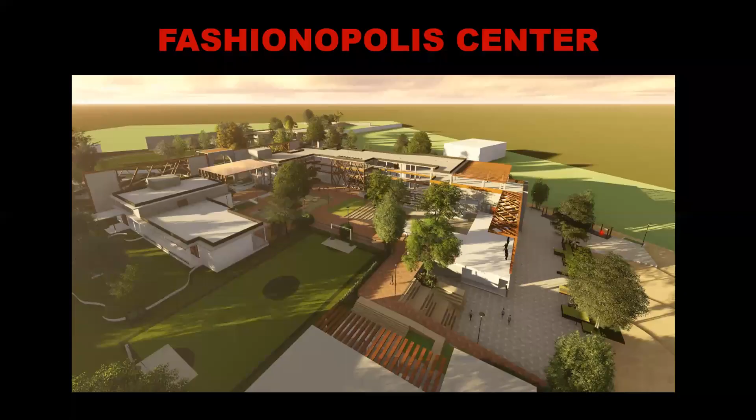Fashion is the most powerful art. It is a movement, design, and architecture all in one. It shows the world who we are and who we'd like to be. So, fashion should be a form of escapism and not a form of imprisonment.

So, I would like to introduce my topic, Fashionopolis Center. Fashion has always been a repetition of ideas. What makes it new is the way we put it together.

So, what does the term Fashionopolis mean? Fashionopolis is a mixed-use project combining unique, futuristic, and varied project components.

As India is one of the fastest growing countries in the world, and Indian fashion is recognized as one of the tremendous fashion industries, the demand of fashion in and around the country has risen drastically.

This is a graph showing the top 10 cities of fashion colleges in India, from which we can see that Bangalore has the most number of colleges. And these are some of the major fashion institutes in India.

And this map shows the major fashion institutes in Bangalore, from which we can see that most campuses are located towards the center of Bangalore.

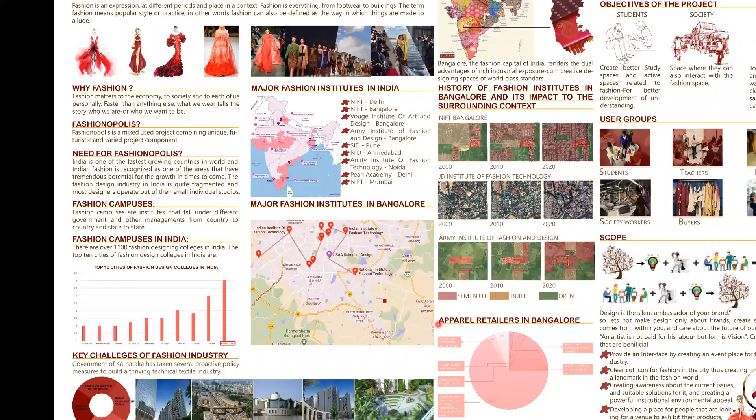So why does Bangalore consist of such a lot of fashion campuses? It is due to the dual advantage of rich industrial exposure from creative designing spaces of world-class standard.

A few major fashion institutes in Bangalore were looked upon to understand the development over the years, that is NIFT Bangalore, JD Institute, and Army Institute.

Now, coming to the aim of the project, the aim is to explore the depth of the Fashion Institute and combine spaces and events that are unique and functional to the fashion world.

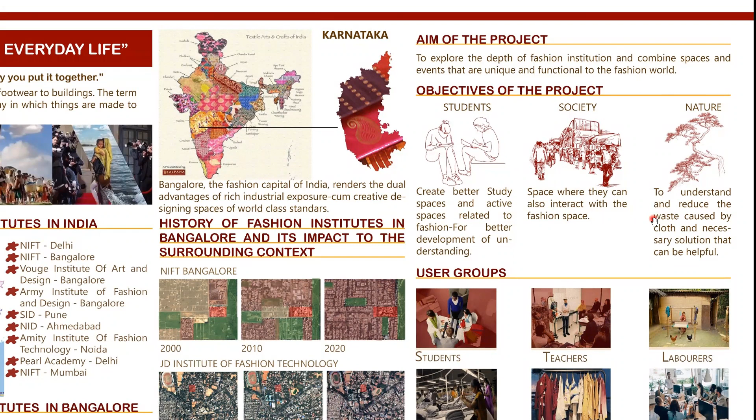The objectives are to create better study spaces, spaces to interact with fashion-related spaces, and to reduce the waste caused by clothes and other necessary solutions.

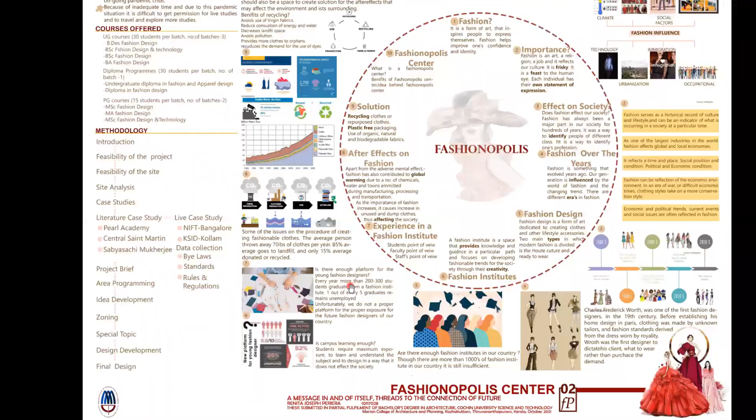Now moving to the feasibility part of the project: what is fashion, the importance of fashion, the effect on society, fashion over the years, fashion design, what is a fashion design, what is a fashion institute.

And the experience of a fashion institute, and the after effects on fashion and its solution, which led to the Fashionopolis Center.

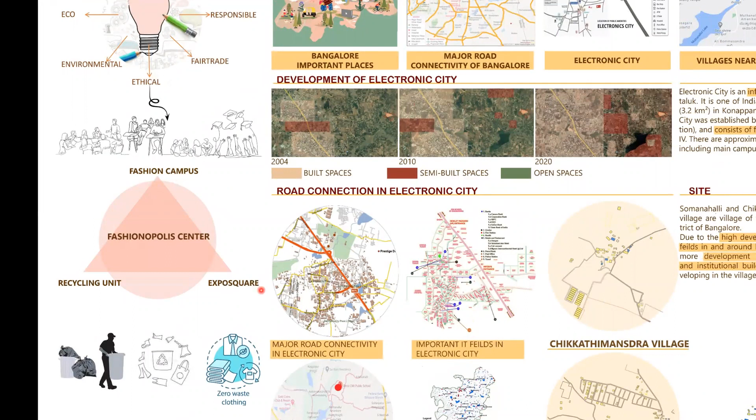The Fashionopolis Center, based on the study, consists of three major components: the fashion campus, the Exposquare unit, and the recycling unit.

And in order to provide this project, I've chosen my site in Bangalore near Electronic City. So the development of Electronic City and major road networks was studied, which led me to the site in Chikkathimansdra village.

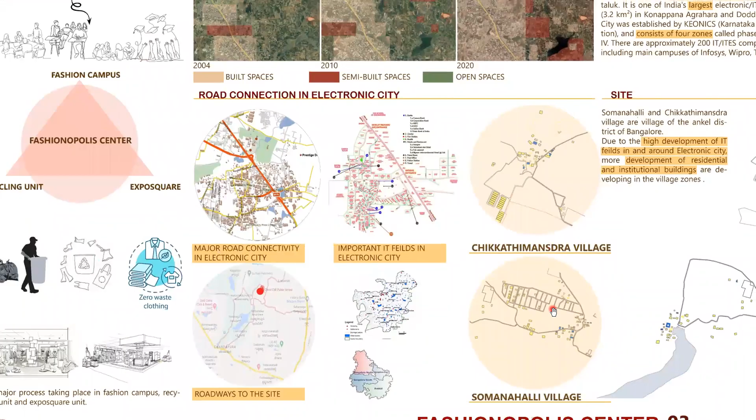And Somanahalli village of the Anekal block. Now coming to the site analysis, the site is located in Somanahalli village near the Christ CMI Public School, Bangalore.

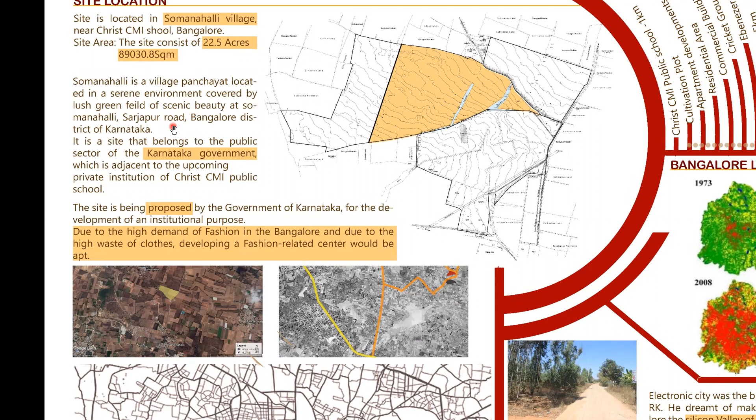The site consists of 22.5 acres. The site belongs to the public sector of Karnataka government, in which the site is being proposed by the government of Karnataka for the development of an institution purpose.

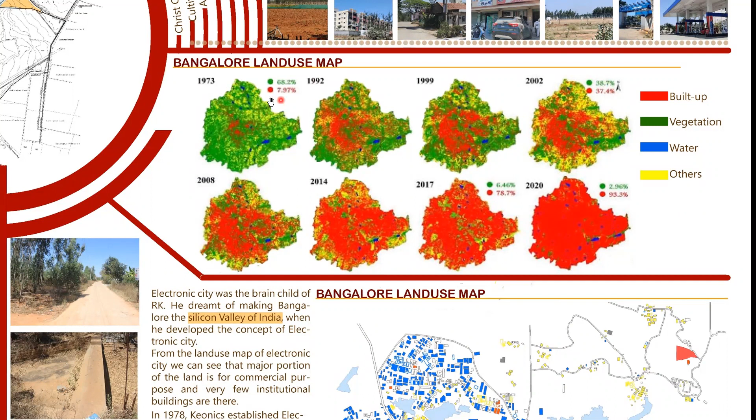So this is a context within a 5-kilometer radius from the site. This is the land use map of Bangalore, from which we can see that the built-up has increased from 7.9 to 93% over the years.

Coming to the land use map of Electronic City, we can see that the city consists of more commercial and IT buildings and very few institutional buildings.

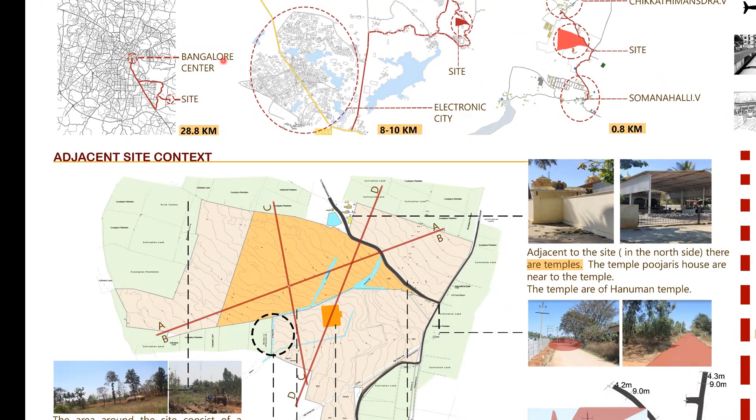Now, coming to the site context, the distances from Bangalore centers, Electronic City, and from the nearby villages to the site. And in the adjacent site context, on the northern side of the site is the temple.

One is a Hanuman temple, and on the southern side is the Christ CMI Public School, with plantations like eucalyptus, grapes, jacktree, etc. on the east and western side.

There are electrical lines that run through the main road. Then there is also a water channel that runs through the site, which passes through the Christ CMI Public School.

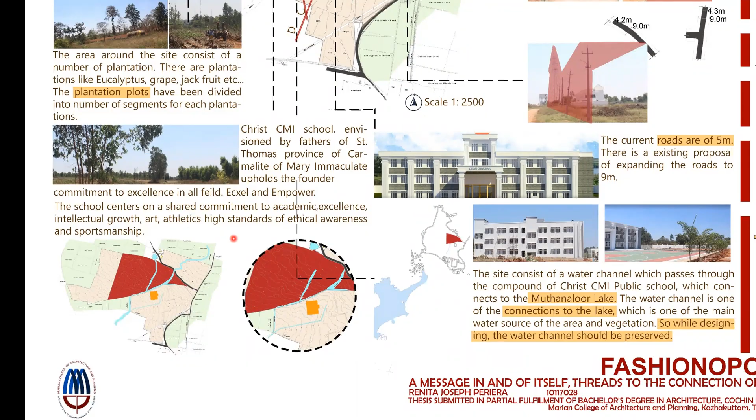To the Muthanaloor Lake, which is one of the main water sources of the area and for vegetation. The water channel has lost its connection in some parts of the site, as the site was filled with mud for plantation purposes. Here are some of the pics and sections of the site.

Now coming to the vegetation mapping, the main vegetation in the site is eucalyptus plantation in the center, and at the edge thick vegetation like jack tree, coconut tree, bombax tree, etc.

Due to the high temperature during the months of March to May, the leaves of eucalyptus trees are dried.

This is the land use map of the Somanahalli village and the main roads to the site, with the nearby water bodies to the site.

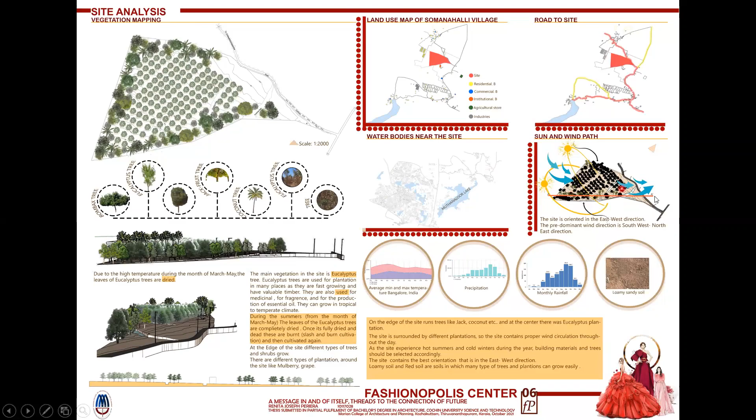Now coming to the sun and wind path, the site is oriented in the east-west direction and the predominant wind direction is southwest to northeast. So the building should be oriented based on the wind direction.

The soil present in the site is loamy and red soil, so any kind of plantation and trees can be grown.

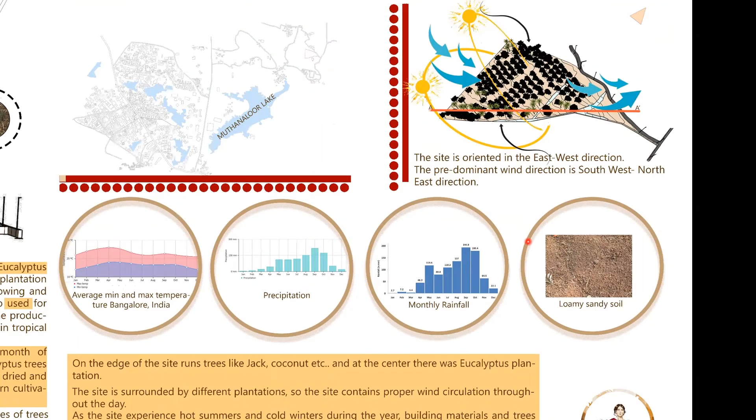Now coming to the SWOT analysis, some of the strengths of the site are that it's located in Bangalore, which is known as the fashion capital of India. It is also located in an area with proper vegetation and proper ventilation.

The site consists of an existing water channel that runs through it. The building should be designed in the southwest-northeast direction based on the wind direction.

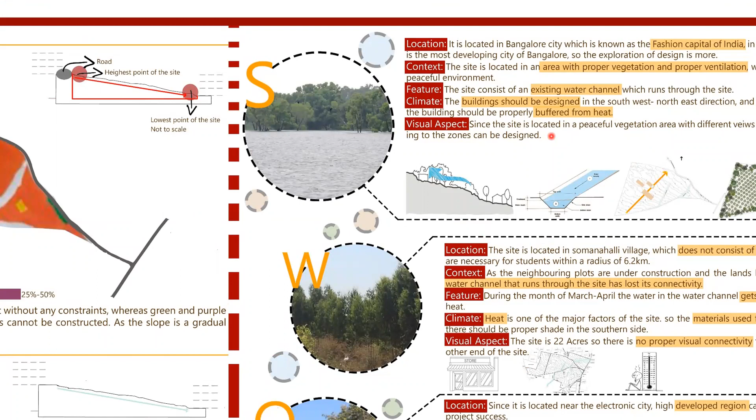The weakness of the site is that it does not consist of any purchase stores necessary for students within a radius of 6.2 kilometers.

As there are plots that are under construction or used for vegetation, the lands are being filled, which causes the loss of connectivity of the water channel.

So heat is one of the major factors of the site, and the material used for construction should be chosen accordingly.

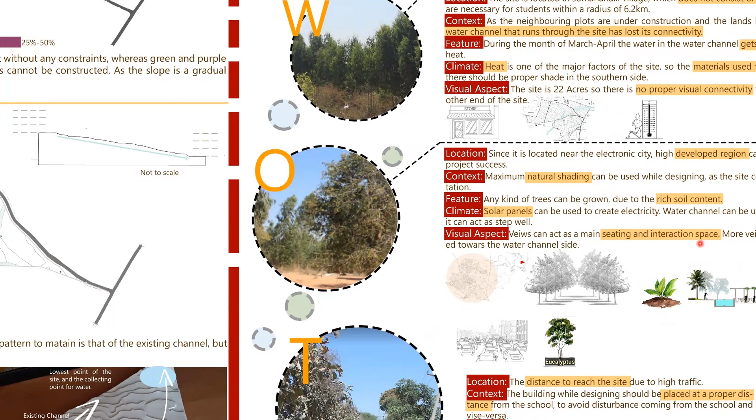There is no proper visual connectivity from one end to the other end of the site, as the site is of 22 acres. Now the opportunities in the site: it is located near Electronic City, which is a highly developing area.

This helps to make the project a more successful one.

Maximum natural shading can be used while designing. Any kind of trees can be grown due to the rich soil content, and more views should be oriented towards the water channel, creating more seating and interaction spaces.

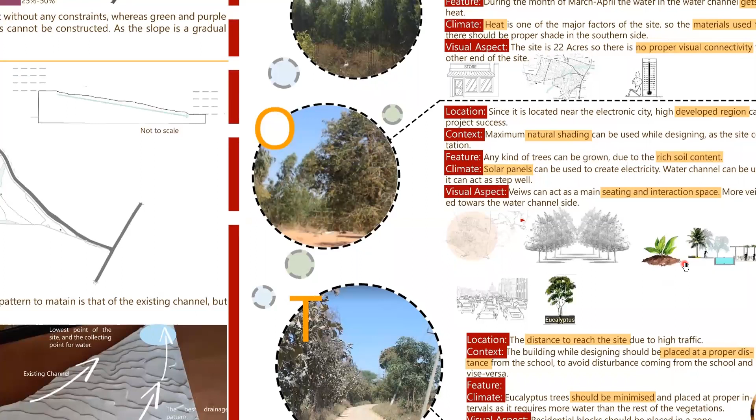Now coming to the threats: while designing buildings, they should be placed at a proper distance from the school to avoid disturbances. The amount of eucalyptus trees should be minimized as it requires more water than the rest of the vegetation.

Now coming to the case studies, there are 5 case studies: 3 literature studies and 2 live studies.

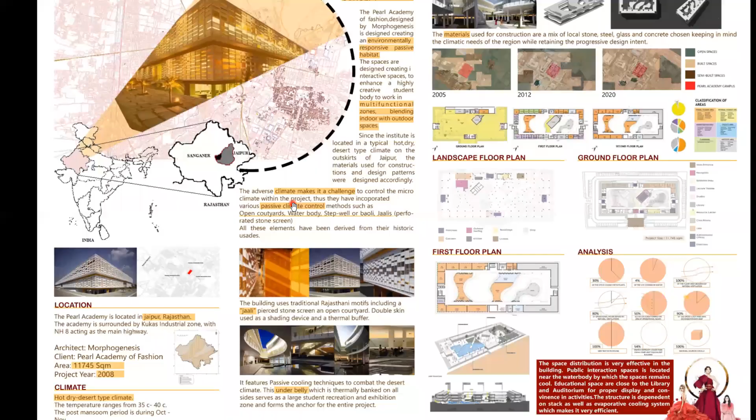The first one is the Pearl Academy, located in Jaipur. The reason I chose Pearl Academy is due to its passive climatic control design, where they have used jali walls to control the amount of heat entering the building.

It also has passive cooling techniques to combat the desert climate and other various climate control methods such as an open courtyard, water bodies, and step wells.

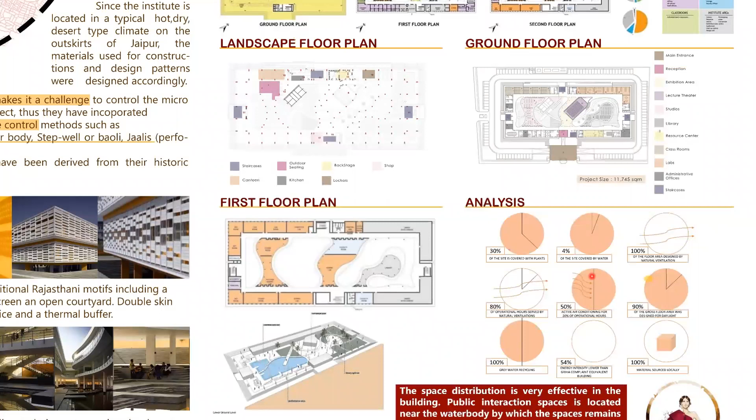In the analysis, we can see that 30% of the site is covered with plants, 4% covered with water, 100% locally available materials were used for construction, and the space distribution is very effective throughout the building.

The second case study I have chosen is Central St. Martin's, located in London. The main reason I chose this is because of its interaction with the water body and the use of skylights in the hallways and in the design classrooms.

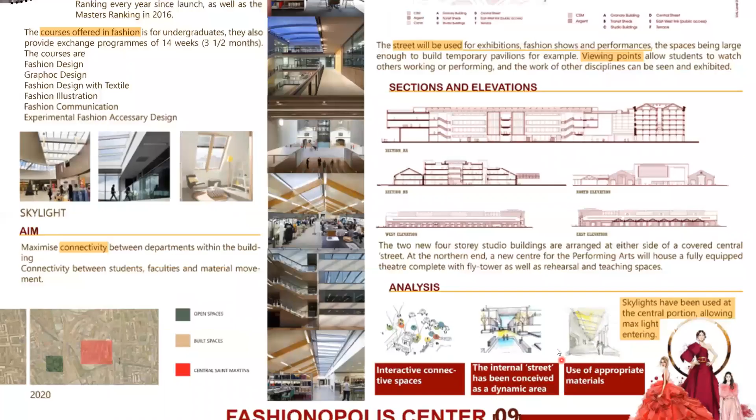Coming to the analysis, there are more interactive connected spaces as the campus consists not only of fashion design but also other courses. Now moving to the third literature study, I have chosen the Sabyasachi Mukherjee store.

Situated in New Delhi, the idea of choosing this project was due to the symmetrical planning with stairs that divide the 2 blocks and also act as an elementary feature to the site. Though the exteriors are very simple, the interiors are its contrast, with bright and decorative elements.

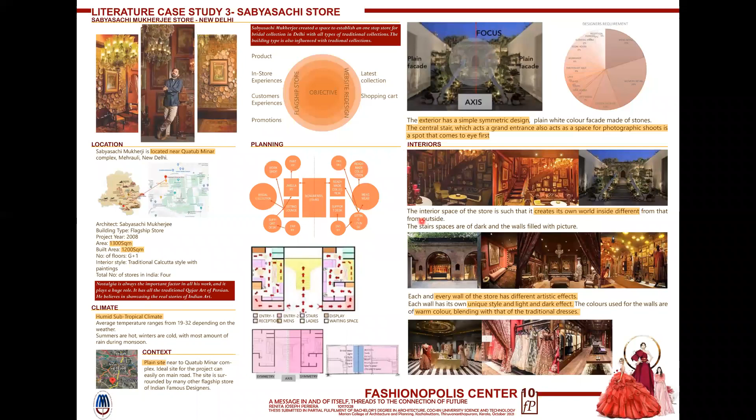Now coming to the live case studies, the first case study that I have chosen is KSID, which is located in Kollam. The architecture style of KSID is vernacular architecture of Kerala.

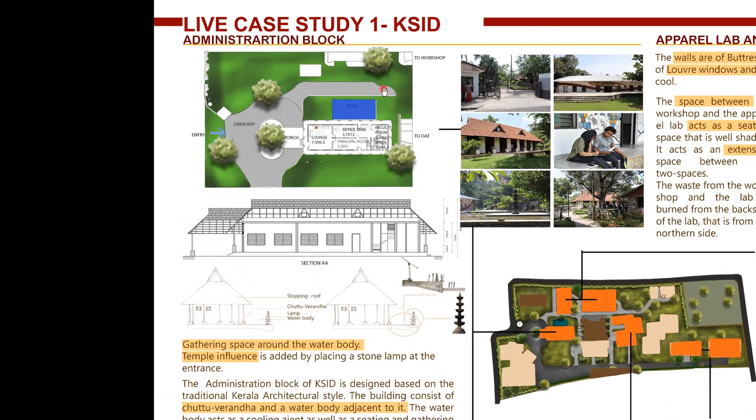Moving to the plans, the administration block consists of a water body. It is not only an elementary feature, but it also acts as a gathering space.

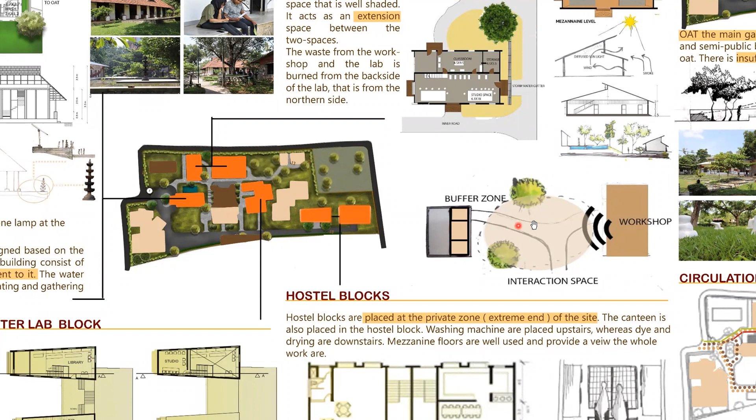The space between the apparel lab and the workshop is a buffer space used as a work exhibition space or for interactions. The library, textile, and computer lab block acts as a clock tower, as it is the tallest building on the site.

This is the circulation movement of different user groups within the site. The buildings are designed with north light, allowing maximum natural light to enter the building.

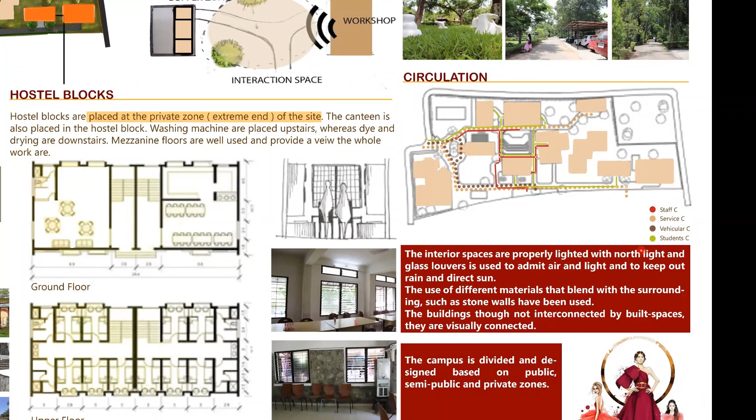The second case study that I have chosen is NIFT, Bangalore. The concept of the building is developed based on the golden spiral, or based on a snail shell.

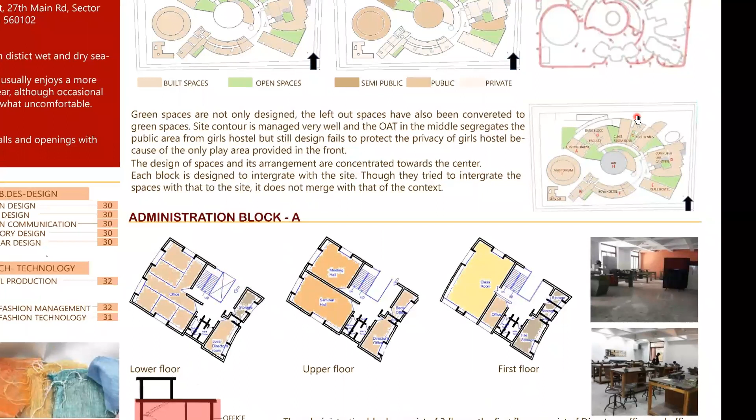The campus consists of a number of blocks, from A to I. In the administration block, the building is divided into public, semi-public, and private zones vertically.

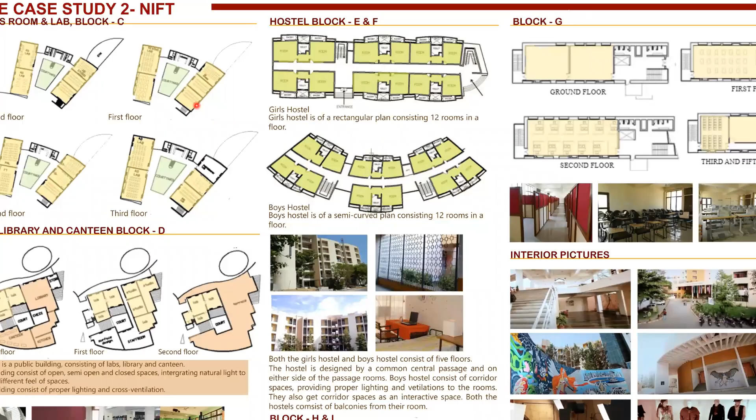There are courtyards or open spaces between classrooms, allowing maximum natural light and ventilation to enter the spaces. The building is designed incorporating built and open spaces in an equal ratio.

The interior walls of the building consist of a number of art and design works done by students.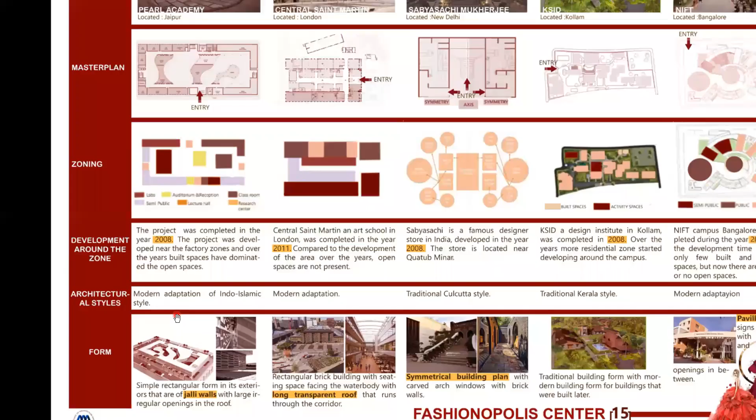Factors like development around the zone, architecture styles, and form will be looked upon, in which the Pearl Academy consists of a simple rectangular form in its exterior with jali walls.

Central Saint Martins is of rectangular brick buildings with seating spaces facing the water body, with a long transparent roof running through the corridor. In Sabyasachi, it is the symmetrical building plan with carved arch windows and brick walls.

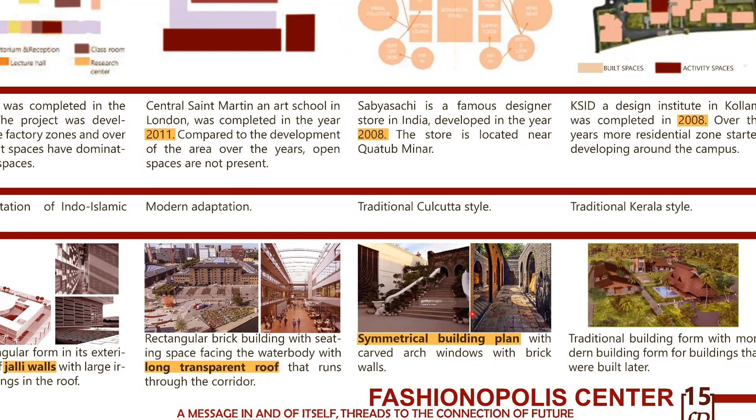And in NIFT, it is the pavilion design with landscape detailing.

The pie chart shows the programs, and these are the circulation patterns of the user groups in each building.

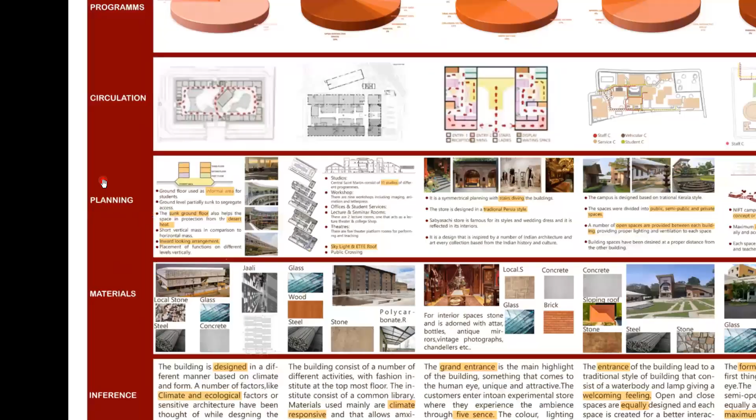Now coming to the planning, in Pearl Academy, the ground floor is used as an informal area for students, with a short vertical mass in comparison to horizontal mass, inward looking arrangements, and placement of functions on different levels vertically.

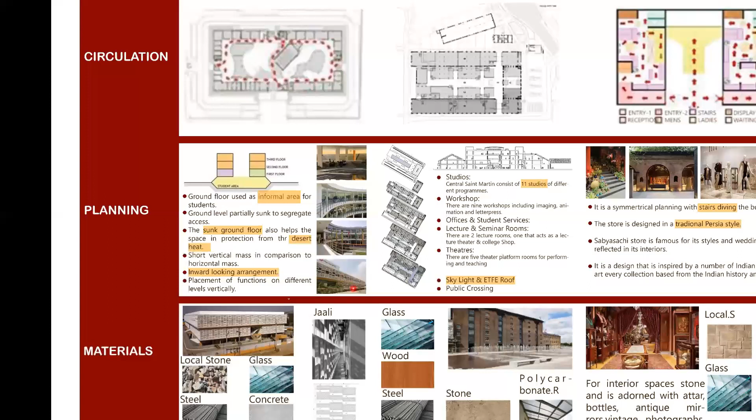Now in Central Saint Martins, there are 11 studios of different programs. There are also workshops, offices, lectures, seminar halls, skylights, and ETFE roofs.

In KSID, the spaces are divided into public, semi-public, and private spaces. A number of open spaces have been provided between each building, providing proper lighting and ventilation to each space. Buildings have been designed at a proper distance from one another.

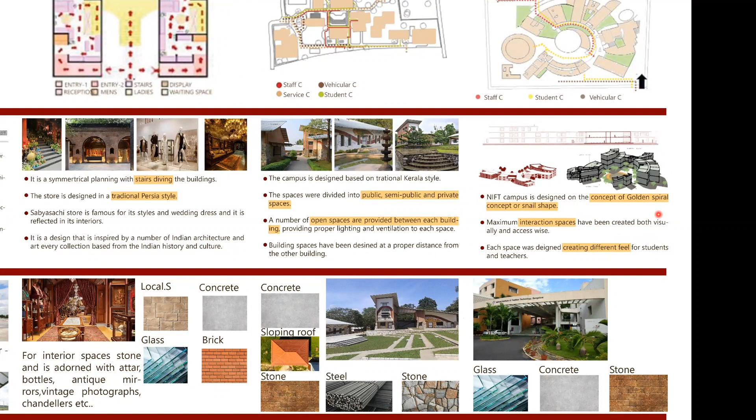And coming to NIFT, maximum interaction spaces have been created both visually and access-wise, and each space was designed creating a different feel for students and teachers. These are the materials used in the buildings, and most of them are locally available materials.

Now coming to the inference, the building is designed in a different manner based on climate, form, and its construction strategy. Climatic response, spatial allocations, all rely on natural environment factors.

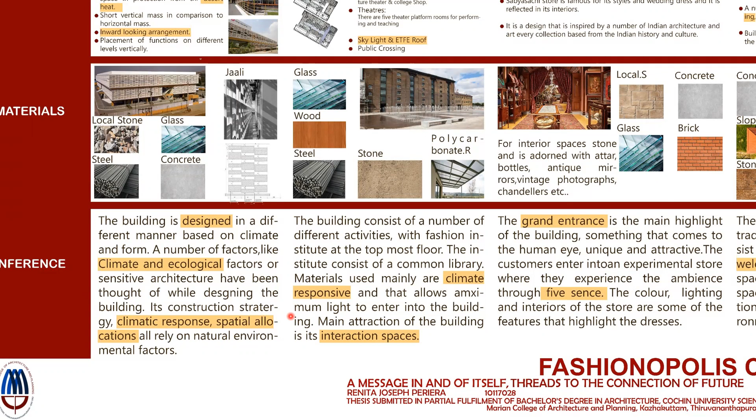In Central Saint Martins, there are different activities within the building, with the Fashion Institute at the topmost floor. And in Sabyasachi, the grand entrance is the main highlight of the building, something unique and very attractive that catches the human eye.

Now in KSID, the entrance of the building leads to a traditional style of building that consists of a water body and a lamp, giving a welcoming feeling.

Whereas in NIFT Bangalore, the form of the building is one of the first things that comes to the human eye. The building consists of open and semi-open spaces equally, allowing maximum natural light to enter, creating more interactive spaces.

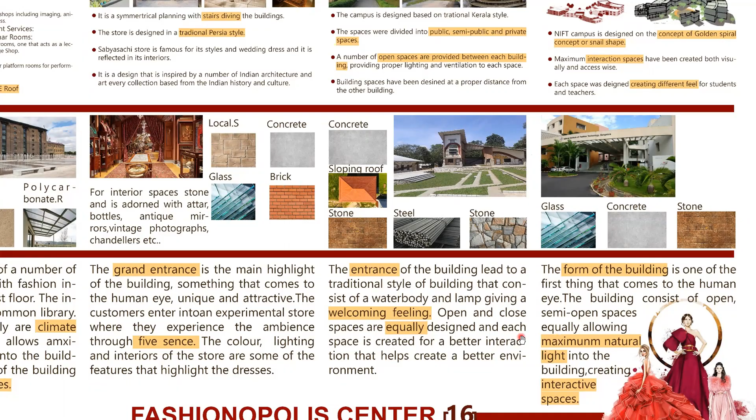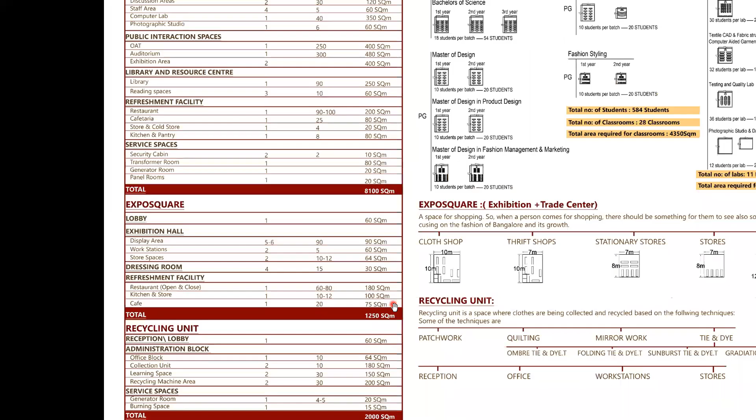So in order to understand the courses and the type of classrooms required, area programming has been done, in which the main courses provided are fashion design, fashion marketing, fashion communication, and fashion styling, with subdivisions of UG and PG courses. While looking into the classroom spaces, certain classrooms require studios, while some require only study spaces, and some require conference or discussion panel spaces.

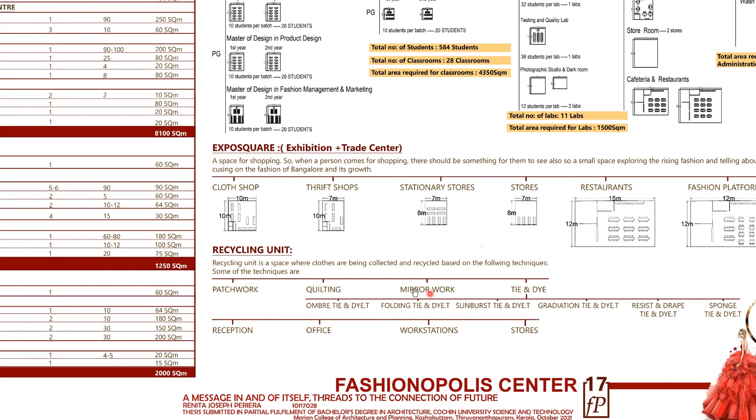So in the Expo Square unit, it is the exhibition plus trade center. It requires a number of stores and other exhibiting spaces. Whereas the recycling unit is a space where clothes are collected and then recycled using different techniques. The main technique used here is the tie and dye process, which requires more of an outdoor space.

Now coming to the design considerations, first user groups were identified, of which 60% of the site consists of students, 15% faculty, 20% society workers, and 5% buyers.

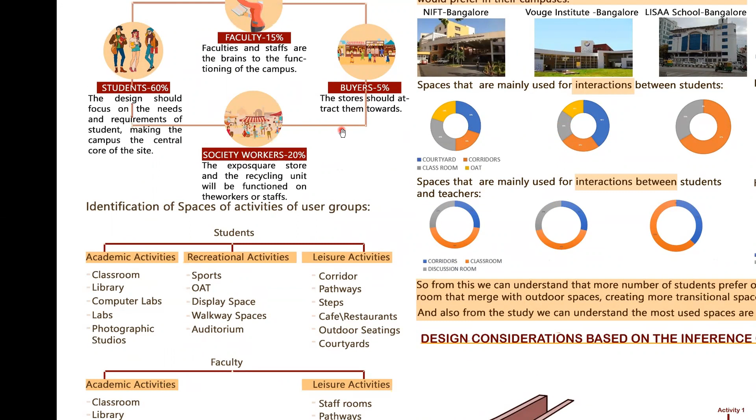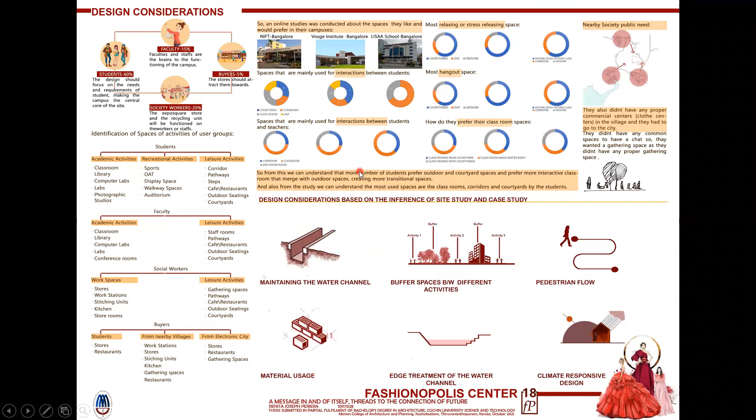I also tried to identify the social and environmental activities of each user group. Based on the user groups, I conducted an online study of 3 different colleges in Bangalore to understand what kind of spaces and which spaces the students would have preferred in their campuses. Based on the study, I inferred that the most interaction happens within the classrooms and corridor spaces, and they preferred more outdoor spaces.

So coming to the design considerations based on the inference of site study and case study: first is maintaining the water channel, then providing buffer spaces between different activities, then providing more pedestrian pathways and reducing vehicular movement, using locally available materials, treating the edge of the water channel, providing maximum interaction between different user groups, and making the design climate responsive.

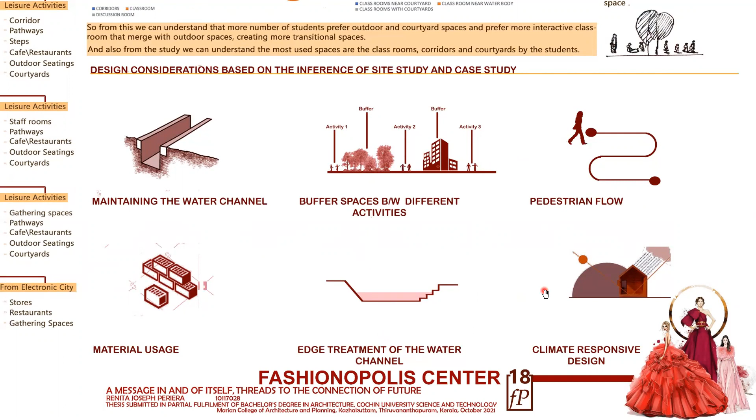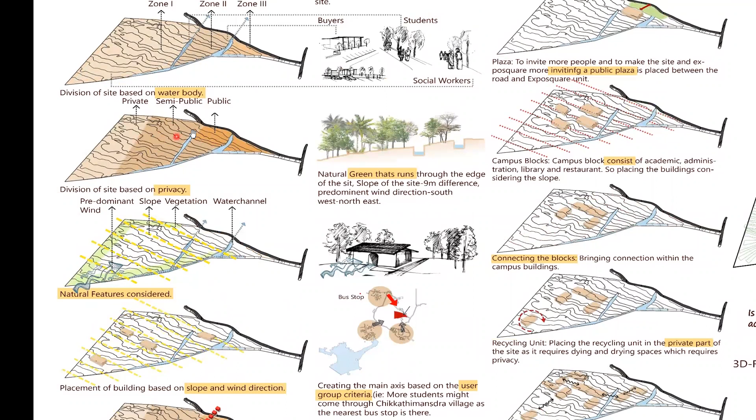Now coming to the zoning, a number of factors were looked upon. First the setback was looked upon in the site. Then the site was divided based on the natural feature, that is a water body, and further divided based on the privacy of the user groups, that is public, semi-public, and private.

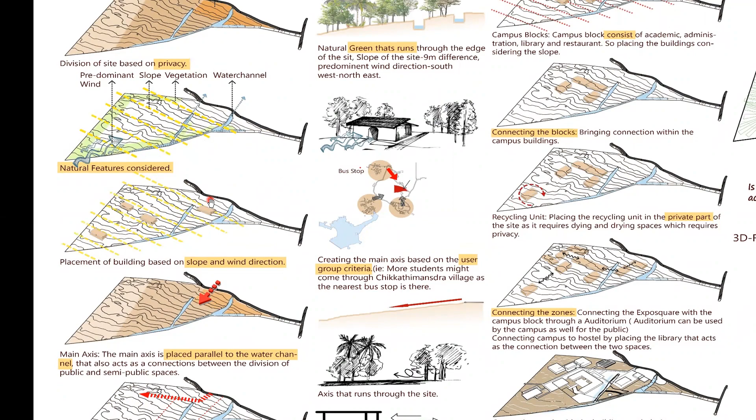So based on the natural elements, that is the vegetation, wind, water body, and the slope of the site, it was then divided, placing the buildings according to the slope and the wind direction. The benefit of the site is that the wind direction and the slope of the site are in the same direction. Now coming to the main axis of the site, or the main entry to the site.

The main entry to the site has been provided based on the user group criteria. That is, most students might come through the Chikkathimansdra village as the nearest bus stop is there. Then from the main axis, 2 parallel sub-axes have been created to enter the different functions.

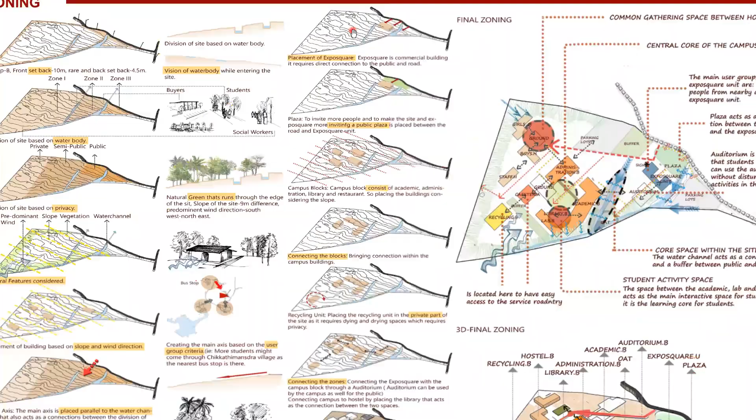Now, placement of the Exposquare unit. The Exposquare unit is a commercial building, so it requires direct contact with the road. Keeping the setback in mind, it is kept at a particular distance. So to create a direct connection, a plaza has been introduced while designing, creating a link between the road and the Exposquare unit.

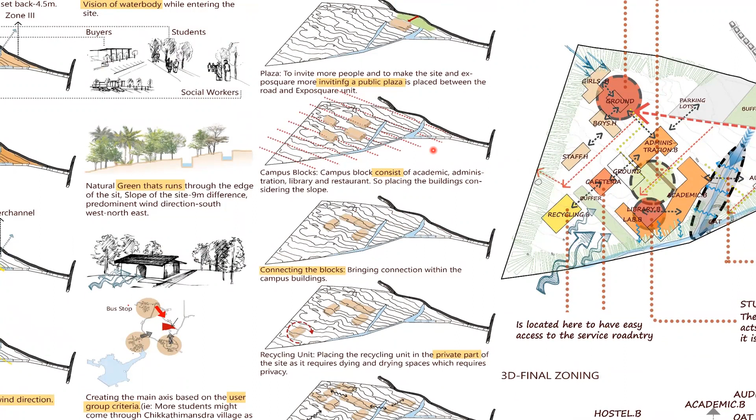Now coming to the campus block, the campus block consists of 4 different activities: academic, administration, library, and cafeteria. The building was placed considering the slope and then adjusted based on the connection patterns.

The recycling unit is placed in the private part of the site as it requires dyeing and drying spaces, which require privacy. So as the spaces are zoned, I wanted to connect those spaces with a building.

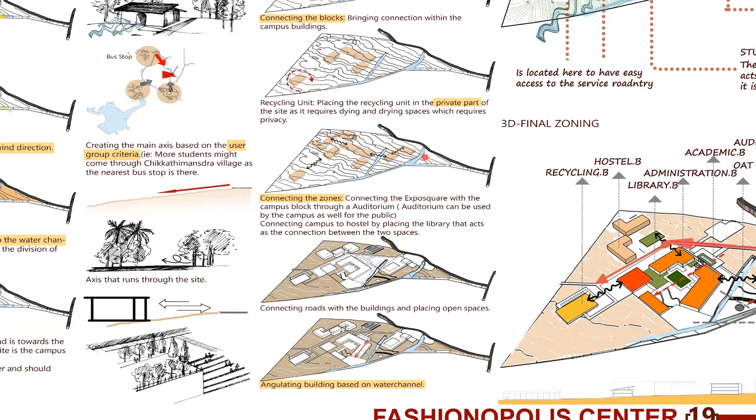So the Exposquare unit is connected to the campus building through an auditorium, which can be used by the campus as well as the public. The campus is then connected to the recycling unit via the cafeteria area, and the campus is connected to the hostel block via the grounds.

Based on this, the road pattern has been developed, from which the academic block, the main block consisting of more user groups, has been slightly shifted parallel to the water channel, allowing maximum view to all sides of the site.

Based on these, the final zoning that I've derived is here: the plaza at the main entry connects the road to the Exposquare unit, which connects to the campus building, that is the auditorium. The campus building is connected to the recycling unit via the cafeteria, and the campus is then connected to the hostel block via the ground spaces. Also, the wind direction and the buildings are placed according to the slope of the site.

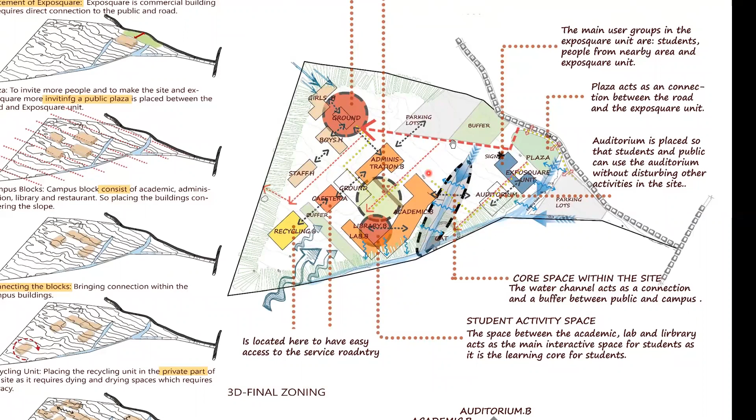This is the block model that was done based on the zoning. Now coming to the master plan.

The site consists of a main entry over here and sub entry with service entry over here. Since the site is designed for different user groups, 4 security cabins have been provided: 2 at the main entry, 1 in the service entry, and 1 over here to regulate the movement of the user groups.

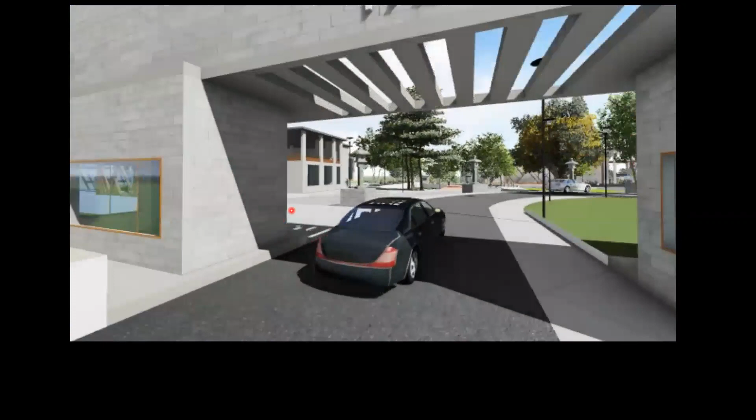The main entry leads to the campus building with a pedestrian pathway of 2 to 2.5 width on either side, with sculptures on one side, directing their way to the campus building, where the campus building has a false facade design with a water body in the center of the road to differentiate the entry and exit of the vehicular movement.

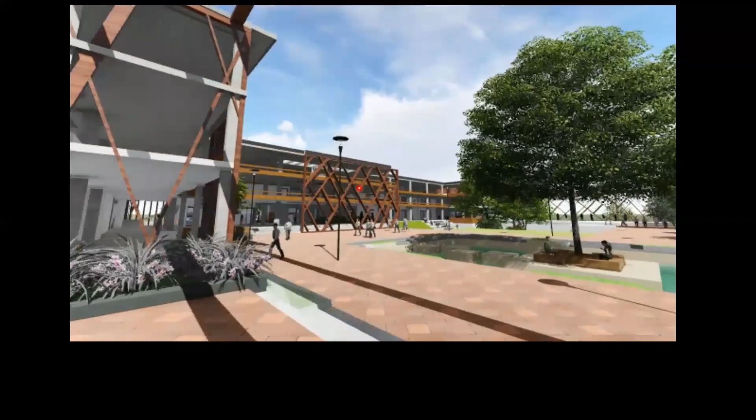Now, coming back to the secondary entry, which is the plaza, a large pedestrian pathway with a number of seatings and stalls and well-shaded trees are designed, and the plaza is designed in the highest portion of the site.

So while designing, the main sub-axes are converted as pedestrian pathways, where the first sub-axis leads to the OAT, and the second, which is in the campus block, leads to the display area. The main axis leads to the residential zone,

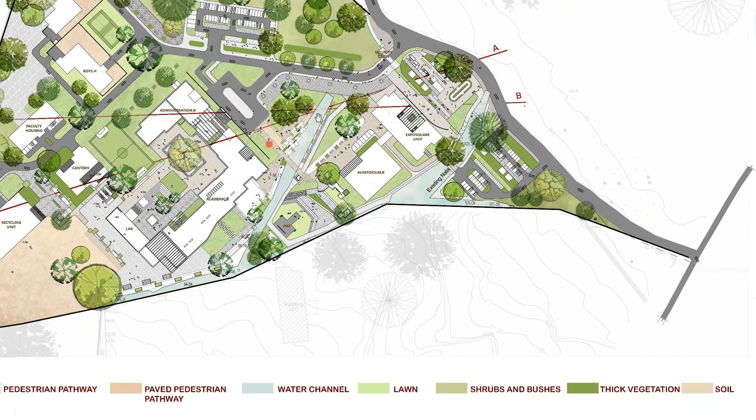and the faculty housing, which then reaches the recycling unit. A number of seating and gathering spaces between each activity to increase interactions have been provided.

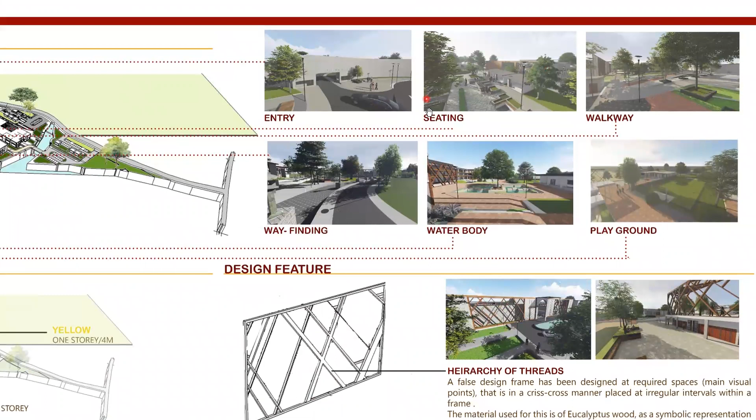Coming to the layers, in the landscape elements, some landscape elements like seating, walkways, water bodies, and playgrounds have been designed. Then these are the built heights of the buildings within the site, the road hierarchy with the number of parkings within the site, and the setbacks and the circulation of the site.

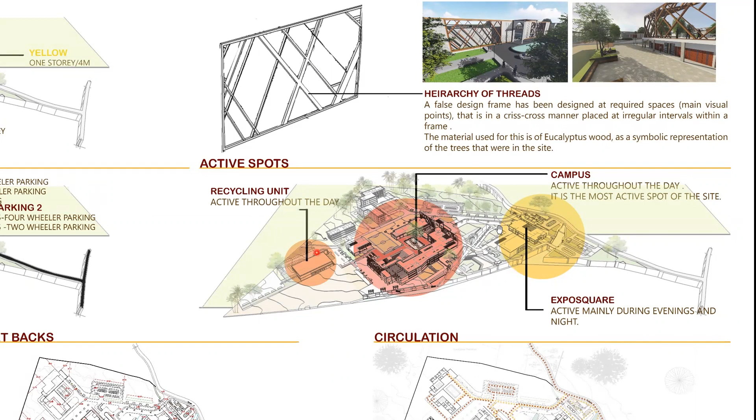Now the different active spots in the site have been identified, which is the campus as the main active zone throughout the day, and the recycling unit is active throughout the day, whereas the Expo Square unit is active during the evenings and nights.

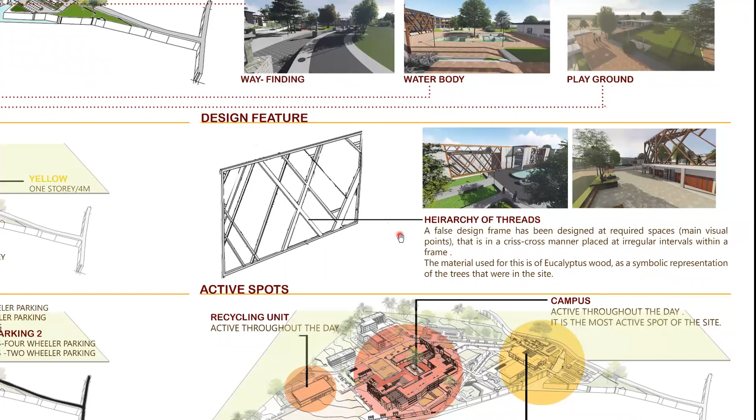Coming to a design feature, a false design frame has been designed at required spaces in a crisscross manner, placed at irregular intervals within a frame. The material used for this is eucalyptus wood as a symbolic representation of the trees that were in the site.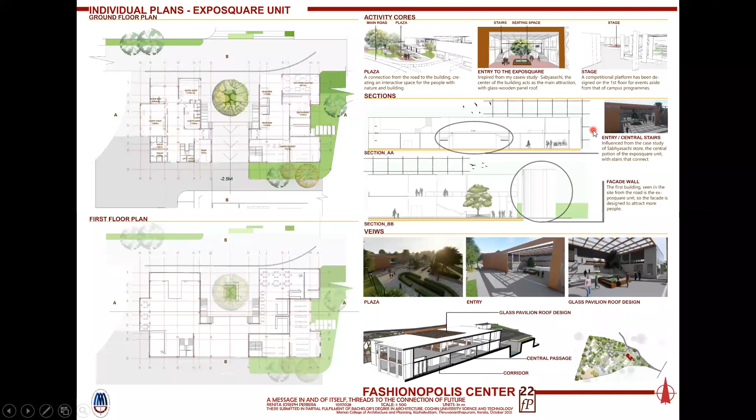These are the sections of the Expo Square unit and the views. The Expo Square unit is the first building which is seen from the road, so a false facade has been designed which is similar to that of the campus building.

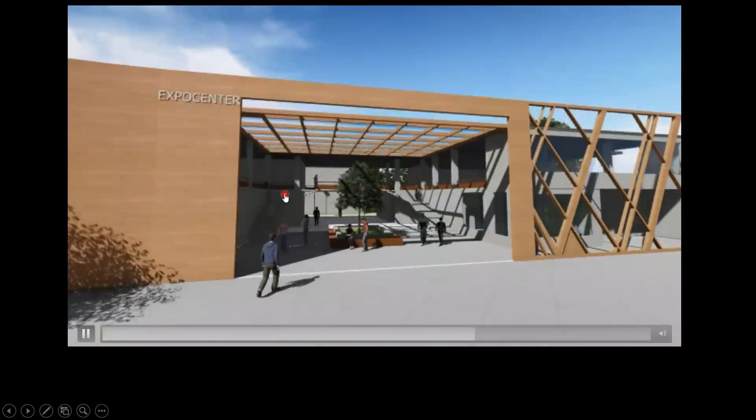This is the plaza which connects the road to the Expo Square unit, and the roof of the Expo Square unit is of glass pavilion design.

Now coming to the individual campus block, the campus consists of 4 units: administration, academy, lab, and cafeteria area. These are connected by the main pedestrian pathway, the main axis.

There's a formal entry towards the administration building, whereas the entry to the academic building is of an informal manner, with corridors of the academic block acting as display or exhibiting areas for each classroom, making the corridors more interactive in design.

The classrooms designed here are of different types based on the area programming, and at the end of the classrooms is the library, which not only consists of reading spaces but also studios, mezzanines, and other workstations.

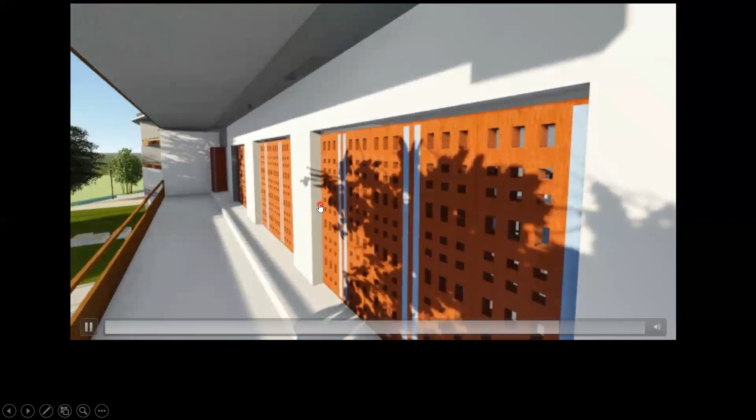So there are different classrooms based on the area programming. This is a conference classroom, a classroom with studio spaces connected to the corridor spaces for a better view, and this is a design classroom with a skylight being provided.

The building also consists of different activity cores within the site. The central core, that of the water body, is not only an elemental feature but also acts as a gathering and seating space.

The second core is a student activity core adjacent to the academic block, providing maximum outdoor seating and discussion areas for students and teachers. The third one is the football ground and lab spaces with walkways that lead to the water channel.

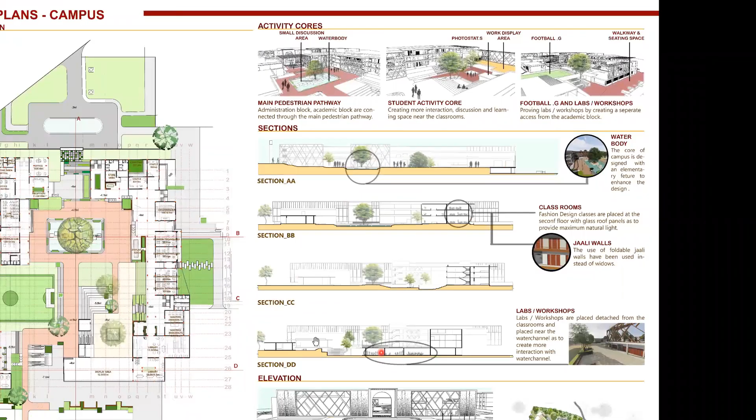Now these are some of the sections, and here we can see that foldable jali walls have been used instead of windows in classrooms.

Coming to the first and second floor plans, in the first floor classrooms like fashion communication and fashion marketing have been designed, whereas in the second floor it's fashion design classrooms with skylights being provided.

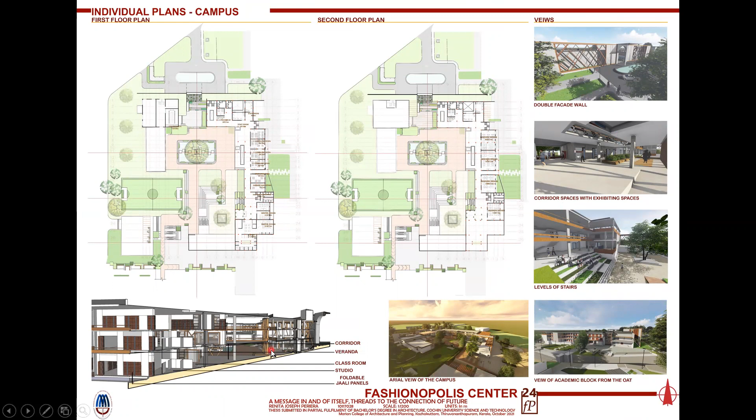So these are the views to the campus and the section. This is an aerial view showing the administration building, the academic building, the central core of the campus, and the student activity core with the playground opposite to it.

The main vision upon entering the site is actually towards the display area and the labs and workshop spaces, which is directed to the water body.

Now coming to the recycling unit. The recycling unit consists of a number of offices and workstations, and also consists of outdoor spaces.

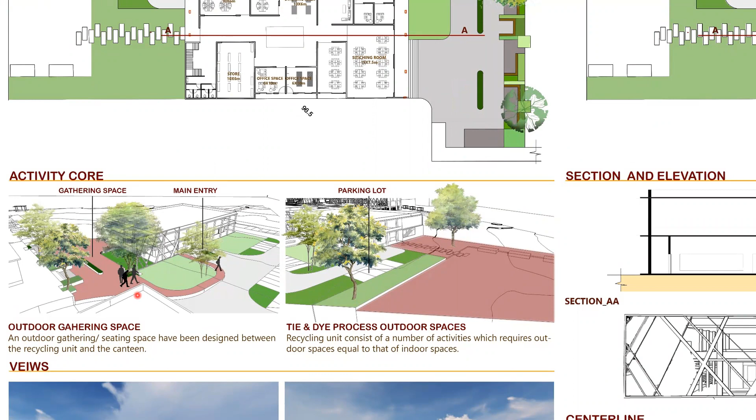For a person entering the recycling unit from the service area, the first vision is towards the gathering space, which is adjacent to the recycling unit, provided for maximum seating and interaction between user groups.

Now coming to the auditorium and OAT plan. The pathway in front of the auditorium is actually a pedestrian pathway, which is then converted to vehicular movement when there are functions in the auditorium.

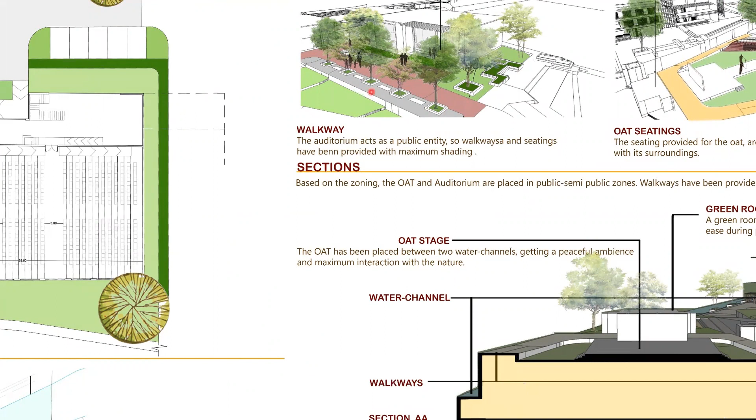The seating in the OAT is of regular seating style to blend the area with the surrounding, and pedestrian pathways have been provided around the auditorium and the OAT region.

Now coming to the individual residential block spaces, there are service roads being provided according to the mess, leading to the hostel blocks, that is the boys hostel and the girls hostel.

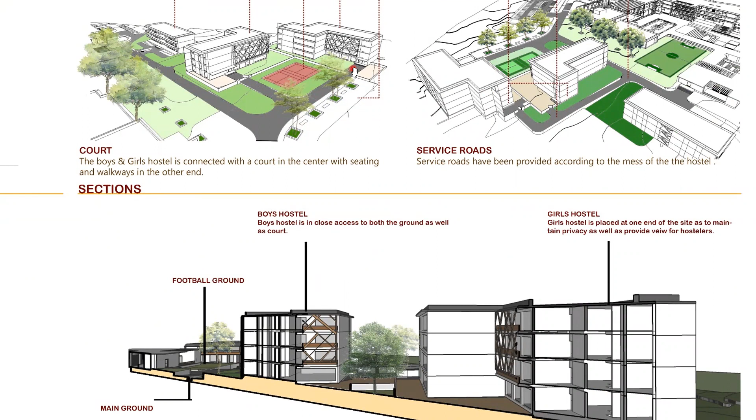The boys hostel and the girls hostel are connected to each other with a court in the center, with seating and walkways at either end.

Now coming to my special topic, chosen based on the natural feature of the site, that is the water body. As the water in the water channel varies during the season, making the channel dry in summer and flooded during the rainy season, different kinds of seating and walkway pathways have been designed at the edge of the water channel.

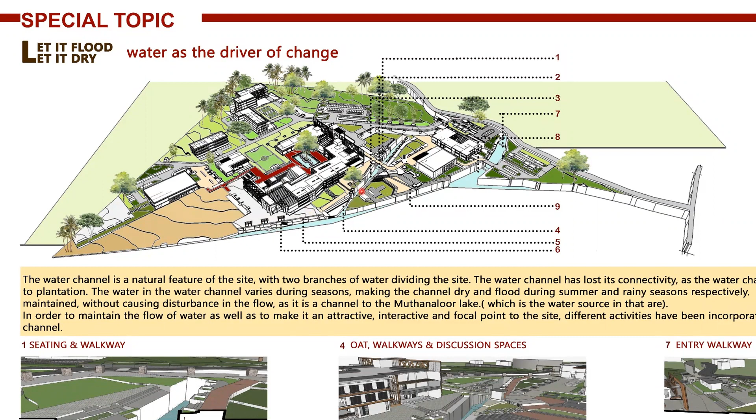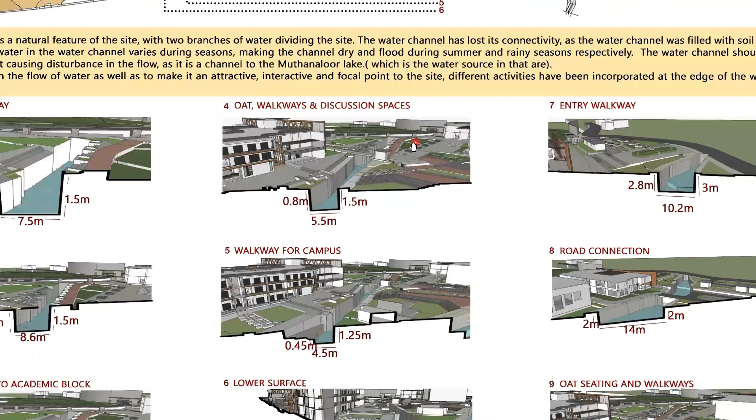Coming to the different types: seating and walkways based on user group usage, then based on the bridge connection connecting the campus to the auditorium building via the bridge, then seating adjacent to the academic block areas, then walkways and OAT spaces connected to the water channel, then walkways for the campus and lower surfaces.

This is actually the lowest surface for the water body, where water might rush and enter the site. This area, being the lowest portion of the site, has been designed with soil to reduce the amount of water entering the site.

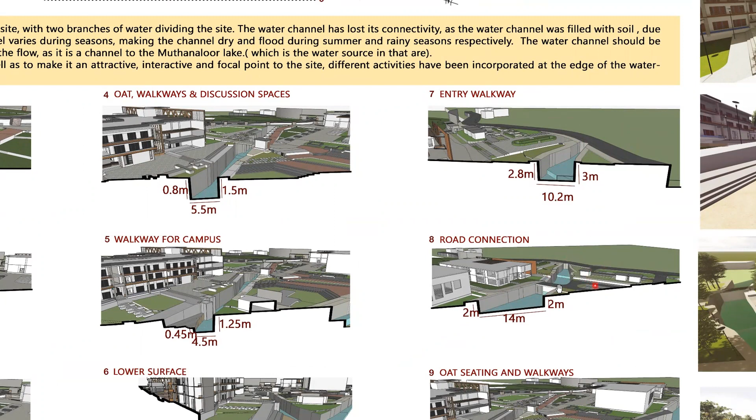Then at the entry of the water channel, walkways are provided, along with the road connecting the parking lot to the Expo Square and auditorium building, and the OAT seating and walkways on either side of the water channel.

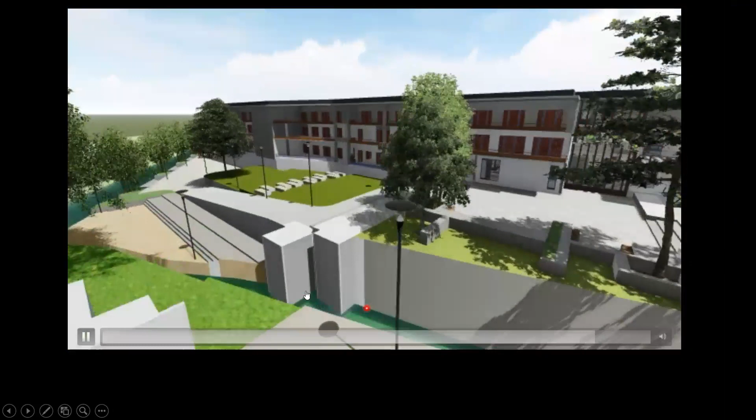So here is the water channel with different kinds of seating, and the bridge connecting the campus and the OAT and auditorium space, with the OAT having different types of seating spaces and walkways that run through the edge of the water channel, at the lowest portion of the site.

So these are some of the aerial views of the site. Thank you.